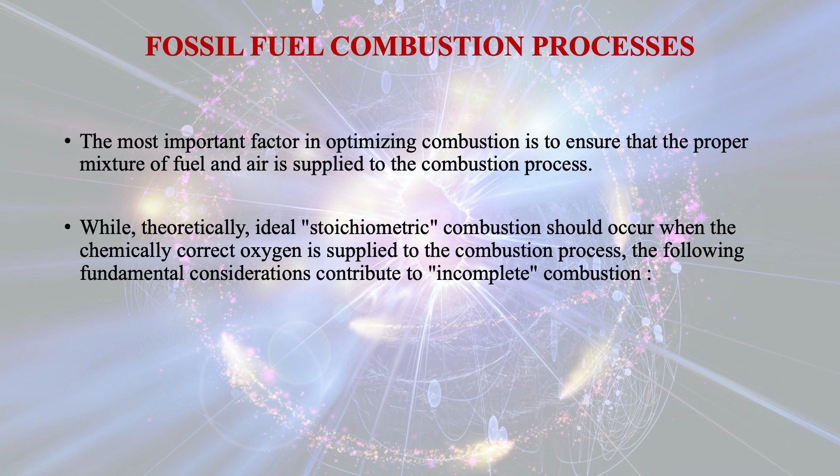While theoretically ideal, stoichiometric combustion should occur when the chemically correct oxygen is supplied to the combustion process. The following fundamental considerations contribute to incomplete combustion. The full value of the heat of combustion is not realized in actual practice for two reasons. The latent heat of vaporization of the water formed by combustion is not available.

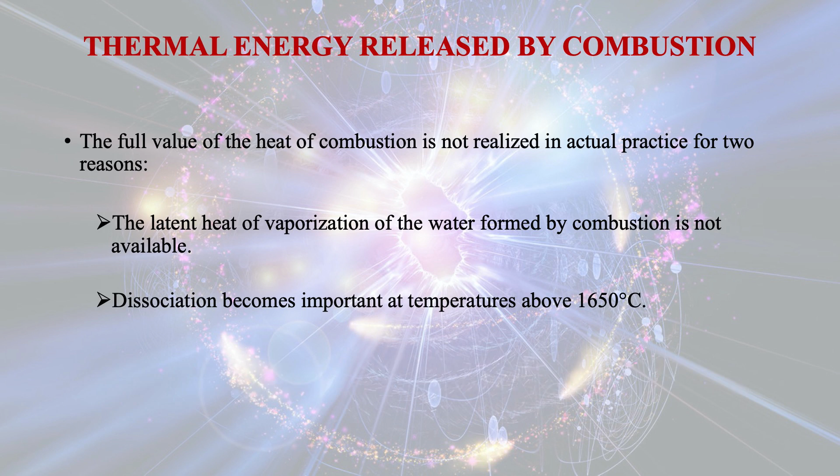Dissociation becomes important at temperature above 1650 degrees centigrade. Inasmuch as the heating value of hydrogen is 1,20,000 kilojoule per kg, while that of carbon is 32,000 kilojoule per kg, the greater the proportion of hydrogen in the fuel, the higher its heating value.

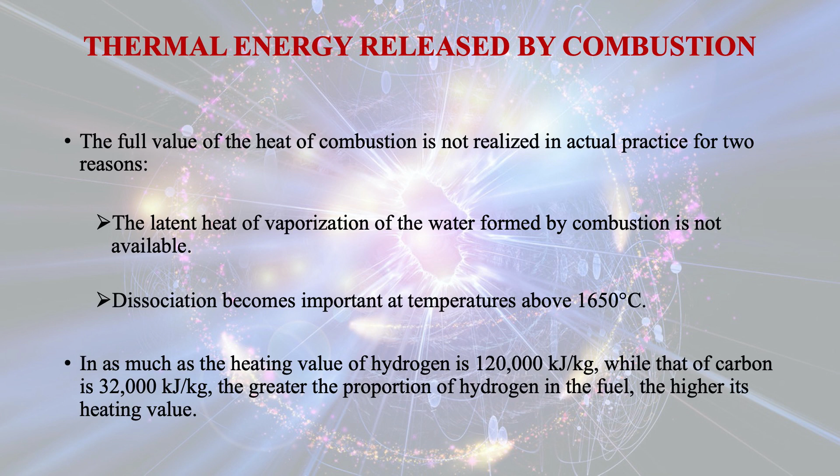However, from practical consideration, the fuel-air ratio is more important than the above factors. Under favorable lean mixture conditions, practically all the thermal energy ideally available from combustion can be obtained. If the fuel-air ratio is richer than stoichiometric, the fuel cannot be burned completely.

The temperature after combustion depends primarily on the inlet air temperature and the amount of thermal energy released per unit mass of mixture, which is principally a function of the fuel-air ratio. The combustion temperature falls off about half as rapidly with an increase in fuel-air ratio above the stoichiometric value as does the heating value of fuel because of the greater amount of fuel present per unit mass of air. Gas turbine and combustion engines are characterized by high combustion temperature resulting from the air compression prior to combustion.

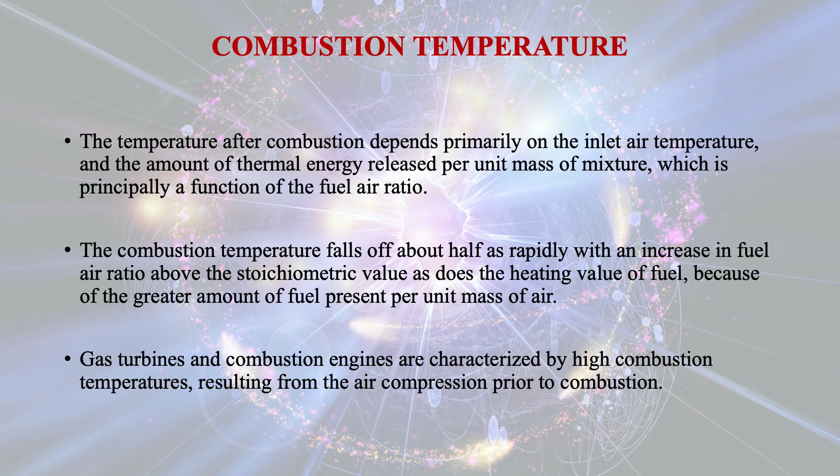Now let us discuss about waste heat recovery. In short form, we call it WHR and its utilization. Waste heat includes industrial process waste steam, thermal power plant reject heat and heat from burning of crop residue, agriculture waste, animal dung, etc. The properties of the various types of waste heat and recovery methods are quite different.

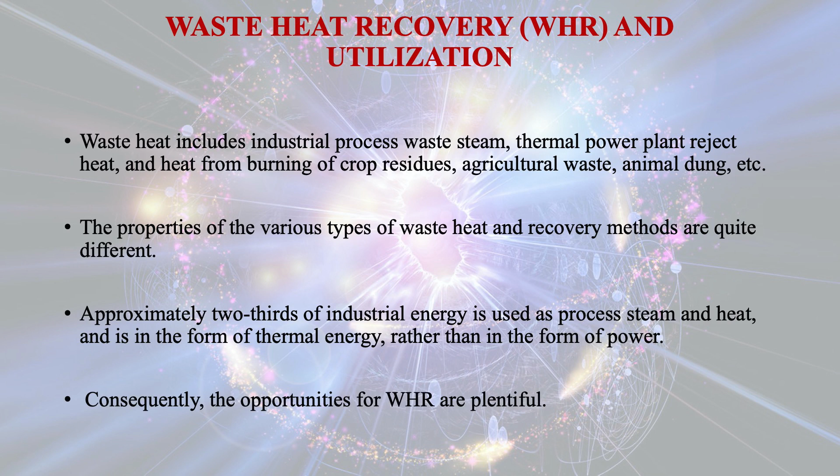Approximately 2/3 of industrial energy is used as process steam and heat and is in the form of thermal energy rather than in the form of power. Consequently, the opportunities for waste heat recovery are plentiful. However, in establishing the opportunities, process energy requirement and waste stream need to be evaluated. The available technology of recovery and their cost and the resulting energy saving determine the economic viability of realizing the waste heat potential.

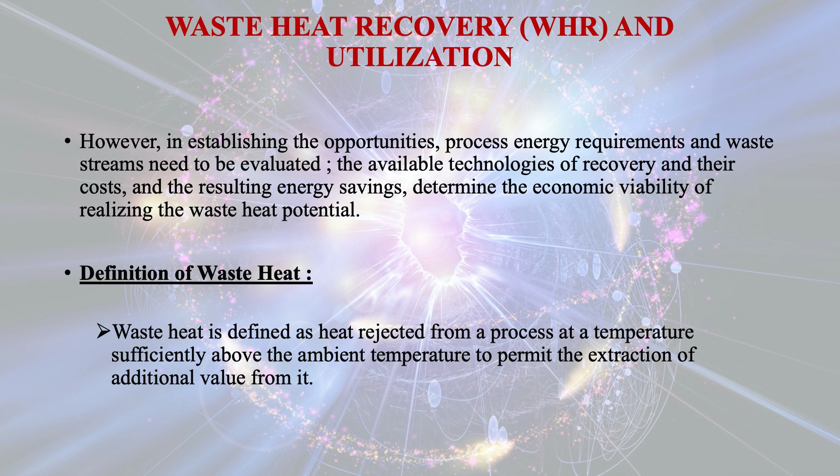Now, let us see what is the definition of waste heat. Waste heat is defined as heat rejected from a process at a temperature sufficiently above the ambient temperature to permit the extraction of additional value from it. Sources and temperature ranges of waste heat, the temperature levels and the location of the waste heat stream relative to the user's need are significant in WHR, that is waste heat recovery. Three temperature ranges are commonly used to classify waste heat.

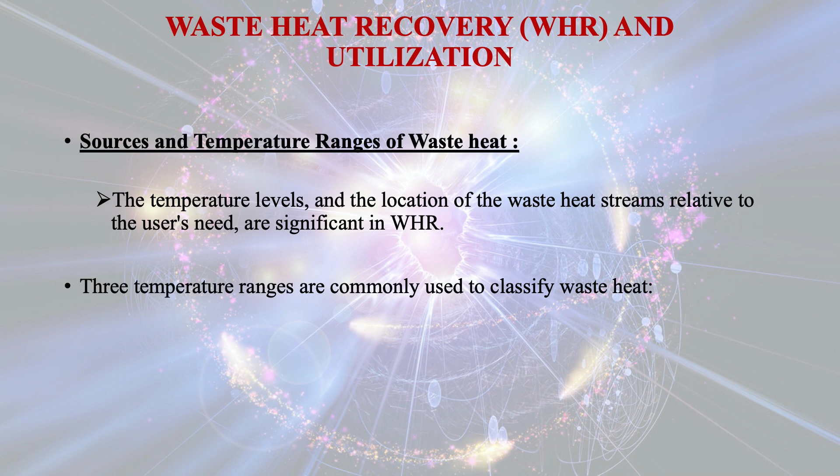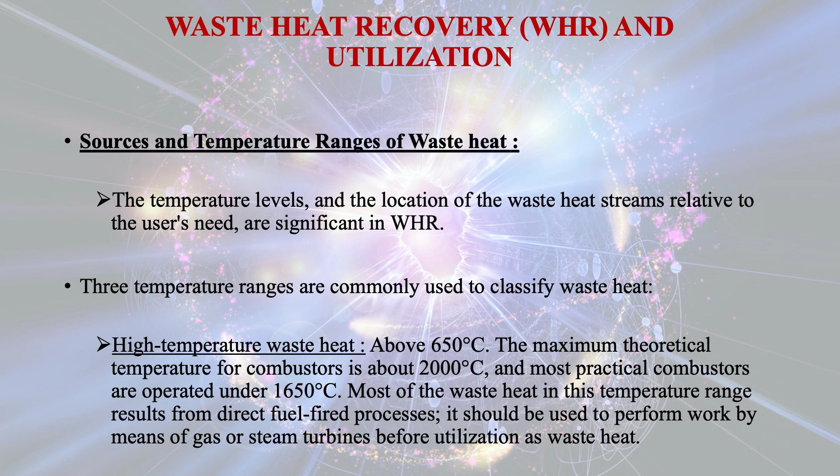High temperature waste heat, above 650 degrees centigrade. The maximum theoretical temperature for combustors is about 2000 degrees centigrade and most practical combustors are operated under 1650 degrees centigrade. Most of the waste heat in this temperature range results from direct fuel fired process. It should be used to perform work by means of gas or steam turbines before utilization as waste heat.

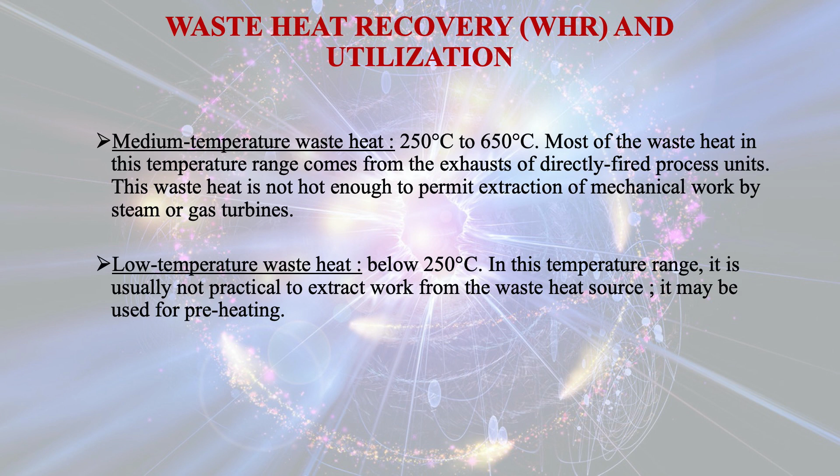Medium temperature waste heat, that is from 250 degrees centigrade to 650 degrees centigrade. Most of the waste heat in this temperature range comes from the exhaust of directly fired process units. The waste heat is not hot enough to permit extraction of mechanical work by steam or gas turbines. Low temperature waste heat, that is below 250 degrees centigrade. In this temperature range, it is usually not practical to extract work from the waste heat source. It may be used for preheating.

Industries having the most potential for waste heat recovery. The following 8 industries are commonly believed to have the most potential for waste heat recovery: petroleum refining, steel industries, aluminum industries, paper industries, olefins and derivatives industries, textile industries, cement industries and glass manufacturing industries.

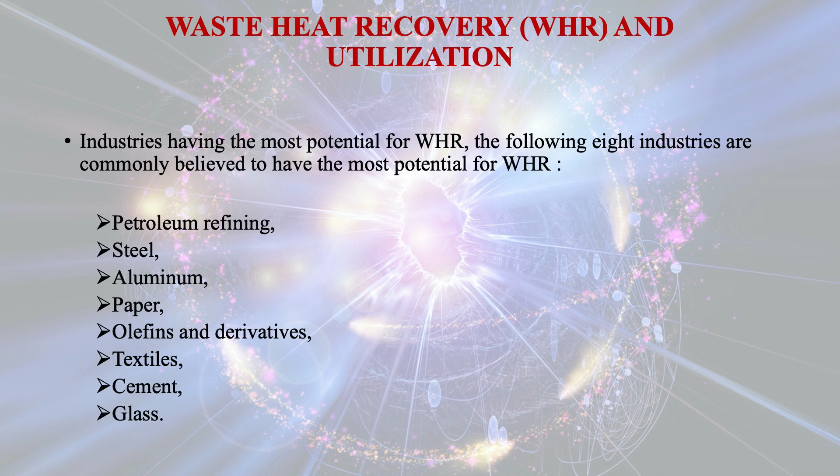There are 2 fundamental types of cogeneration for in-plant power generation system, that is topping and bottoming cycle, differentiated on the basis of whether electrical or thermal energy is produced first. Now, the cogeneration concept is one of the most widely used waste heat recovery process. We discussed about the topping cycle and bottoming cycle for the cogeneration concept.

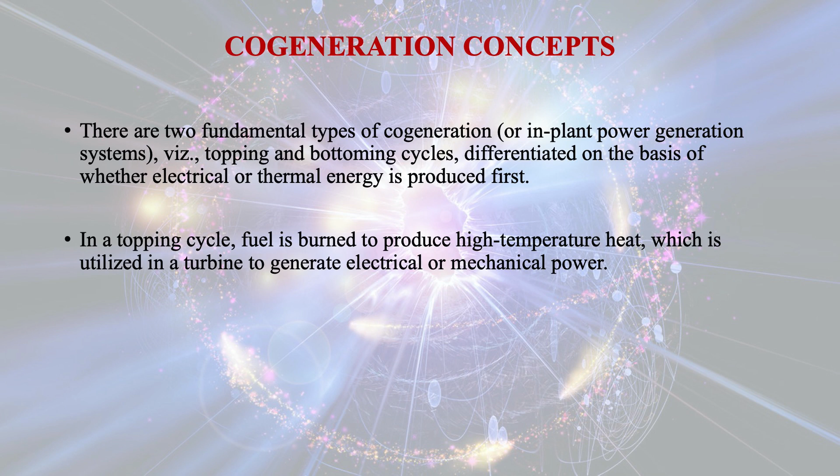In topping cycle, fuel is burned to produce high temperature heat, which is utilized in a turbine to generate electrical or mechanical power. After passing through the turbine, the reject heat is then used in industrial applications as process heat. On the other hand, in a bottoming cycle system, fuel is burned initially to produce process heat, with the reject heat used to generate either electrical or mechanical power.

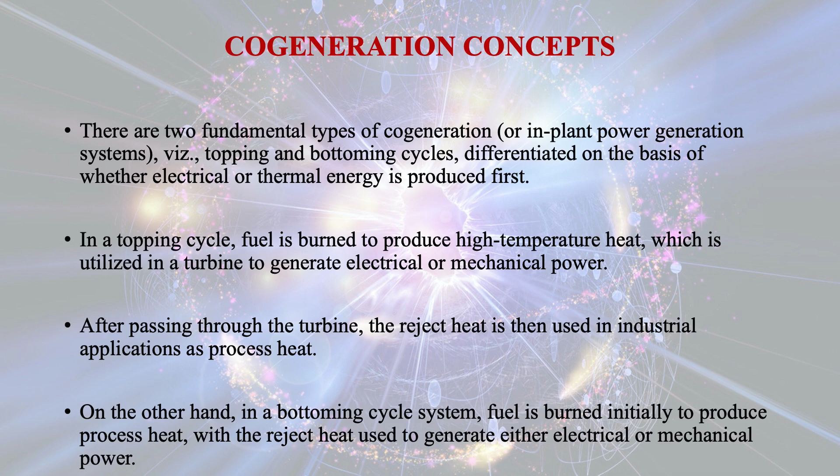Particularly in large organizations and those using significant amounts of various forms of energy, the energy manager, combining technological and managerial expertise, has an important role to play in controlling energy costs. His position should confer authority and respectability, and he should report direct to a senior executive. He should have free access to all information on energy matters.

The major function and duties of an energy manager are to generate and sustain interest in energy management, to disseminate information on energy conservation opportunities and strategies, to deliver lectures to different groups of employees on energy management, highlighting the success stories, and to maintain up-to-date information based on energy purchases, stocks and consumption.

What are the issues in thermal power plants? Nowadays, you know very well that 55% of the power generation has been carried out through thermal power plants, where coal is being used as a fuel in the boiler. Thermal power plants are increasingly facing lower capacity utilization. More than 1/3 of India's total thermal power capacity is currently stranded, and the rest is running at 55% utilization. This creates problems for lenders of these thermal projects, mainly state-owned banks, since lower capacity utilization translates to

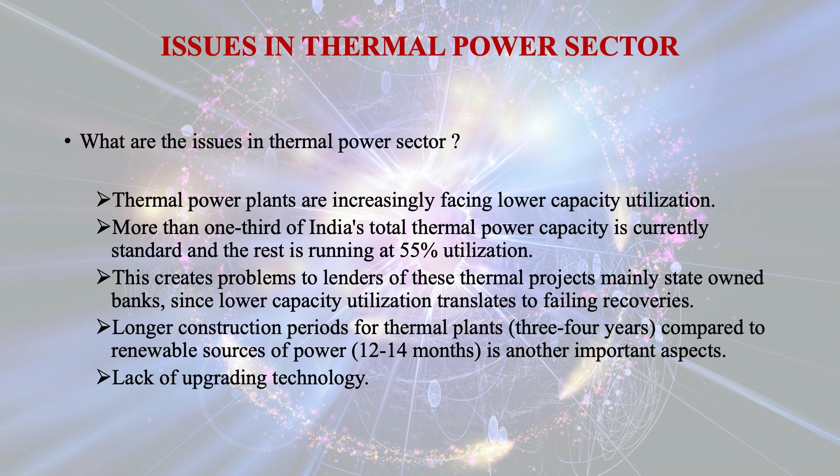failing recoveries. The longer construction period for thermal plants, around 3 to 4 years, compared to renewable sources of power that take about 12 to 14 months for construction, is another important aspect. And of course, there is a lack of upgrading technology for improving the efficiency of thermal power plants. Now let us see how alternate or renewable energy sources can take the lead for power generation, at the same time reducing pollution to safeguard our environmental conditions.

Wind power generation capacity in India has significantly increased in recent years. As of 29 February 2020, the total installed wind power capacity was 37.664 gigawatt, the fourth largest installed wind power capacity in the world. Wind power capacity is mainly spread across the southern, western and northern regions. Wind power costs in India are decreasing rapidly. The levelized tariff of wind power reached a record low of rupees 2.43 per kilowatt hour without any direct and indirect subsidies during auctions for wind projects in December 2017.

In 1986, the first wind power plants were set up at Ratnagiri in Maharashtra, Okha in Gujarat and Tuticorin in Tamil Nadu. With the swift development of wind power, at present India is the fourth largest wind power installation country in the world. With a total capacity of 7,455.2 megawatt, Tamil Nadu is the largest producer of wind energy, followed by Maharashtra, Gujarat and Rajasthan.

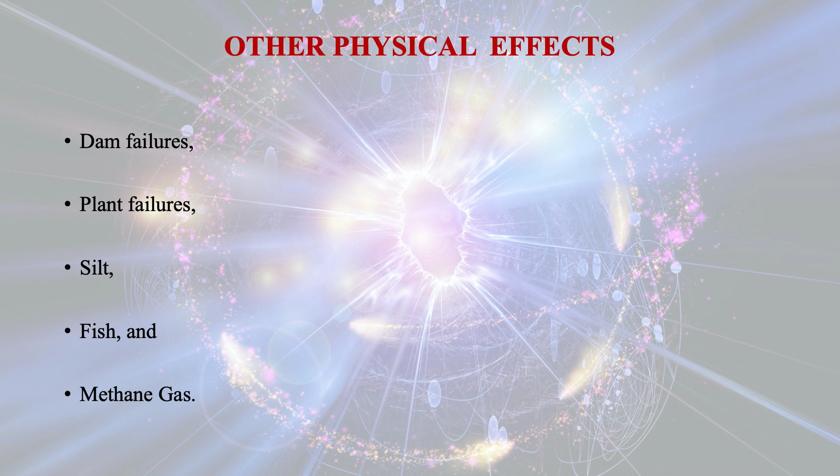Let us first talk about the environmental considerations of hydroelectric plants. In operation, it releases no carbon dioxide and oxides of sulfur and nitrogen. It produces no particulates or chemical compounds such as dioxins that are directly harmful to human health. It emits no radioactivity. Dams may collapse, but they will not cause major fires. Hydrological effects: diverting a river into a canal or a mountain stream into a pipe may not greatly change the total flow, but it can have a marked effect on the environment. Other physical effects like dam failures, plant failures, silt, fish and methane gases are definitely important issues while discussing the safeguarding of our environment.

Now, social effects. Let us discuss the social effects with a very nice story from a child's book on energy. The story begins: they built a dam and made a lake in the place where Shashank lived. Shashank and his family had to leave the farm. His grandfather had also lived there. Shashank was born in that place. He was sad to go. So this is one of the most important aspects of social effects due to the construction of large hydroelectric plants.

Examples of social effects: the Aswan Dam in Egypt and the Kariba Dam at the border between Zambia and Zimbabwe involved the relocation of some 80,000 and 60,000 people respectively, whilst the rising water behind the Three Gorges Dam in China submerged about 100 towns and displaced over a million people. And we all know that the largest hydroelectric plant is located in China. The name of that hydroelectric plant is Three Gorges Dam.

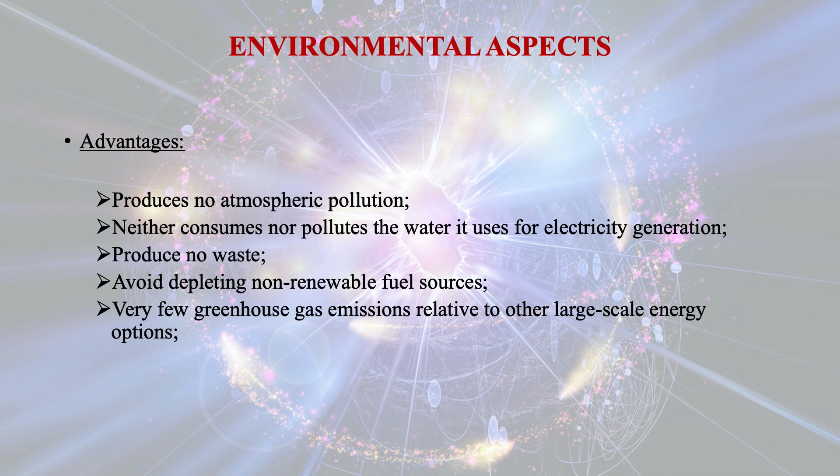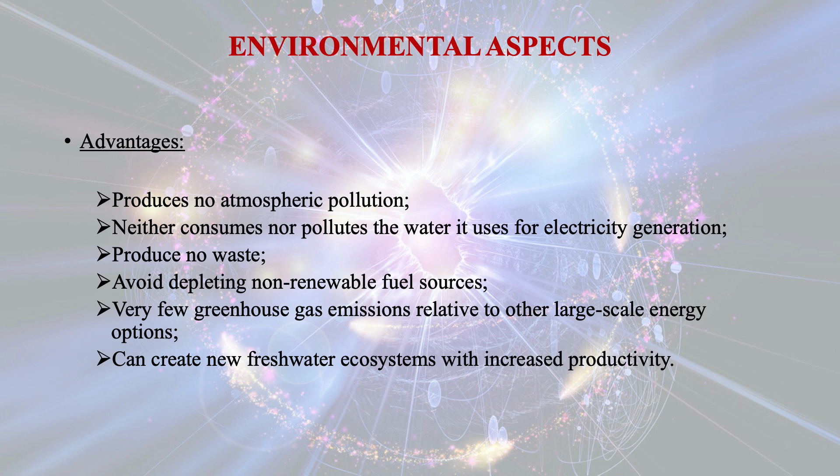There are some environmental advantages of hydroelectric plants. It produces no atmospheric pollution, neither consumes nor pollutes the water it uses for electricity generation, produces no waste, avoids depleting non-renewable fuel sources, and has very few greenhouse gas emissions relative to other large-scale energy options. It can create new freshwater ecosystems with increased productivity. Now let us discuss the disadvantages of hydroelectric plants.

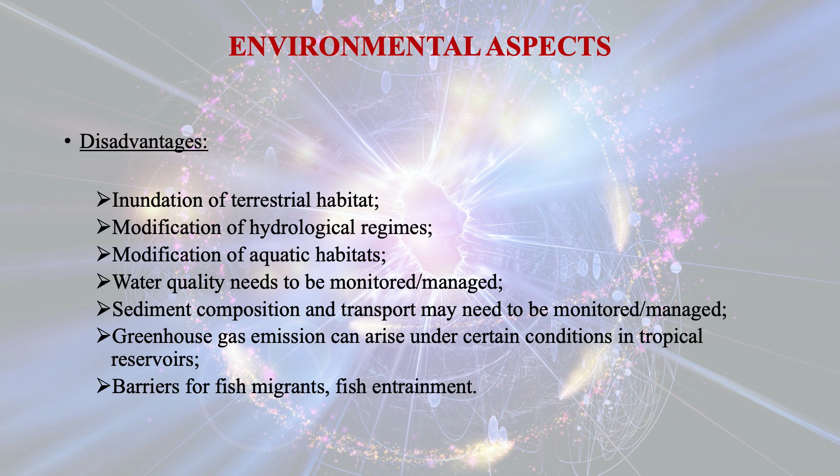Inundation of terrestrial habitat, modification of hydrological regimes, modification of aquatic habitat; water quality needs to be monitored and managed; sediment composition and transport may need to be monitored and managed. Greenhouse gas emission can arise under certain conditions in tropical reservoirs, barriers for fish migrants, fish entrainment. This is also one of the main issues for hydroelectric plants.

All energy sources have some impact on the environment. Fossil fuels, coal, oil and natural gas, do substantially more harm than renewable energy sources. There is air pollution, water pollution, damage to public health, wildlife and habitat loss due to the use of fossil fuel. However, renewable sources may also have environmental impacts, some of which are significant, such as wind, solar, geothermal, biomass

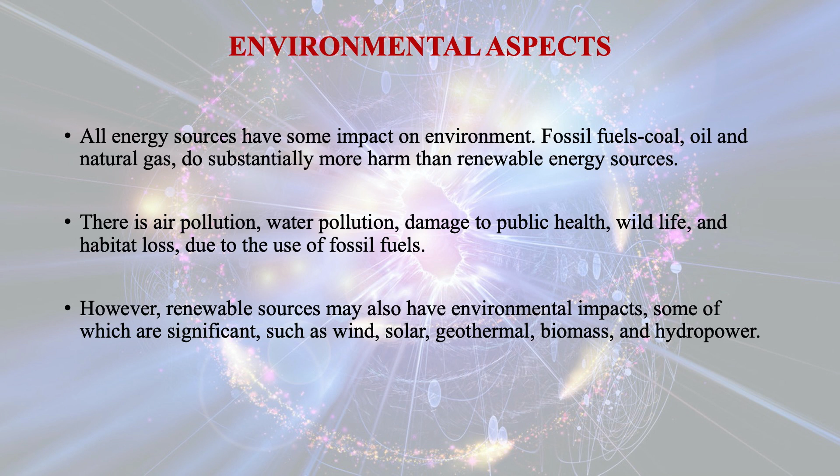and hydropower. The environmental impacts associated with solar power can include land use and habitat loss, water use and the use of hazardous materials in manufacturing, though the type of impacts vary greatly depending on the types of technology used.

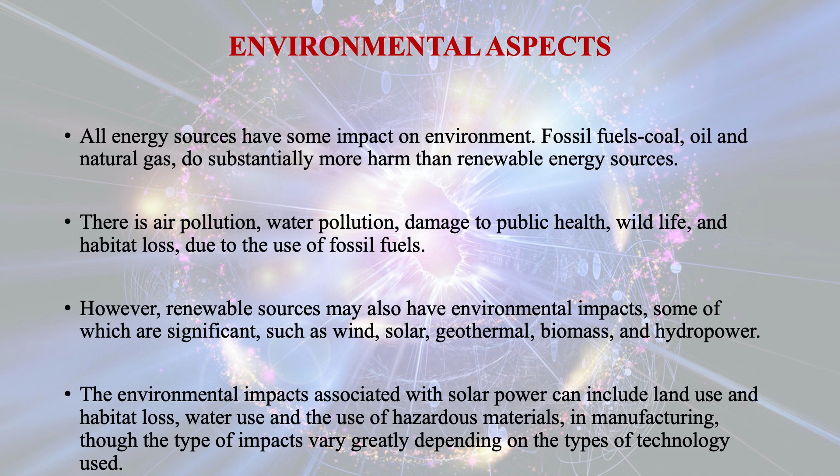Wind power. We can generate electricity with wind power with less toxic pollution or global warming emissions, but it does have some environmental impacts. It includes land use and challenges to wildlife and habitat. It is also abundant and inexhaustible, that's why it can be a favorable energy source in comparison to fossil fuel.

Some state governments are exploring means to address land availability through innovation. For example, they are exploring means to deploy solar capacity above their extensive irrigation canal projects, thereby harvesting solar energy while reducing the loss of irrigation water by solar evaporation.

The state of Gujarat was first to implement the canal solar power project by using the 19,000 km long network of Narmada canals across the state for setting up solar panels to generate electricity. It was the first ever project of its kind in India.

Let us talk about geothermal energy. The environmental impacts of geothermal energy vary depending on the technology used to generate electricity and the type of cooling system utilized. Biomass power. Biomass is organic matter derived from living or recently living organisms. Conversion of biomass to biofuel can be achieved by different methods which are broadly classified into thermal, chemical and biochemical